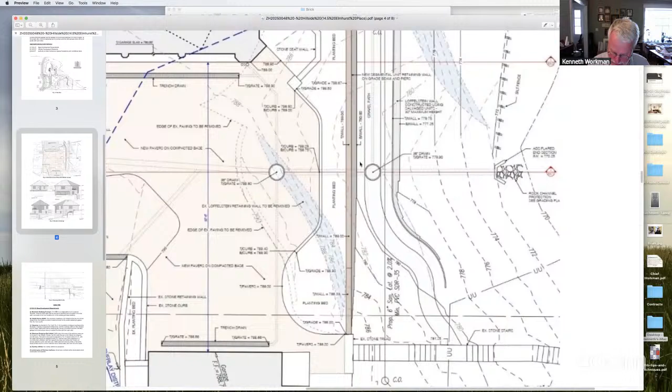This might be a little fuzzy, but this is the existing 2-car garage on the main dwelling. This dashed line represents the footprint of the existing garage that is going to be demolished, and this is the footprint of the new home. We've got a retaining wall along here that helps expand and make access into these garages with a vehicle a little more convenient. Right now, if you can see this little S-shaped curve, it really restricts access into this bay of the existing garage.

We've got a paved area here, basically a 6-inch high curb bounding the paving, a landscaping bed, and this is the wall that is item 1 in the request for relief. This wall is on piers, as is the majority of the new structure, socketed into bedrock.

Importantly, this dashed line represents the hillside overlay district boundary. We are just at the very, very edge of the overlay boundary. It just clips a little bit of the new proposed building.

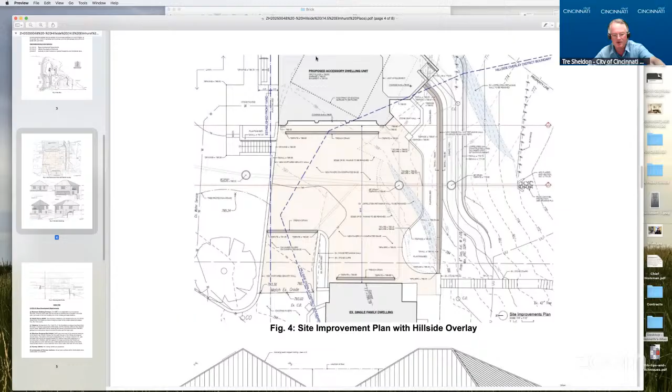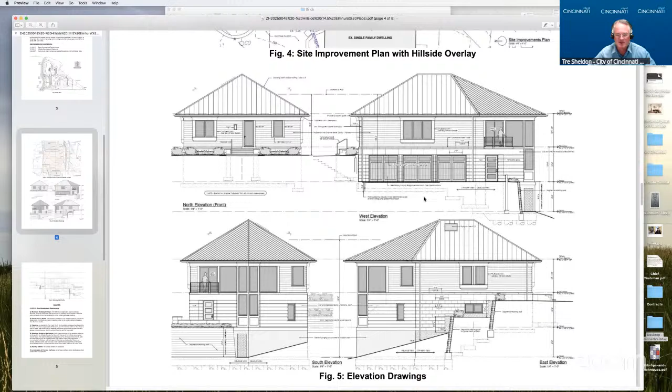Ken, this is Tre. I'm not going to start with my regular comments right now, but I think it would be helpful for the zoning hearing examiner if you go down a bit further to the elevation drawings, so she can understand how it presents as a single story. You can explain it, but it's important that she understand that from the north, this still presents as a single family, single story structure, no greater than the existing garage. I'll let you go.

So helpful, good point. This would be the lawn area, basically the line of the lawn area, and this is what the elevation would look like from the street. There's an existing stone retaining wall that bounds the north side of the existing driveway.

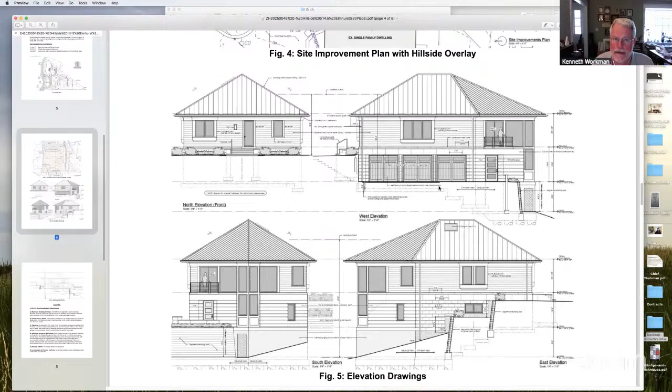That would be this area. I'm not sure if you can see my cursor, but I can. This is the 3 new garage doors that would be here. This is a relatively level area, essentially at the same elevation as it currently is.

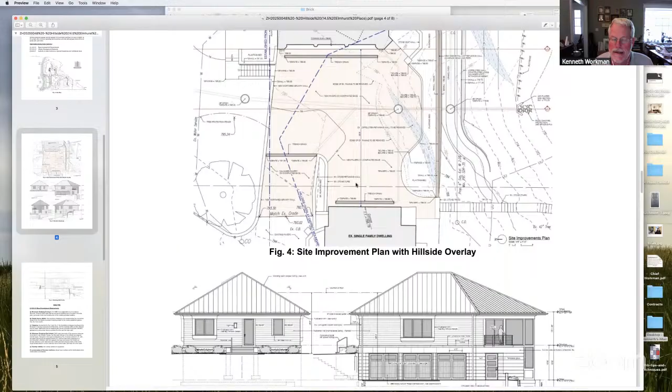And if we come down here again, this would be the retaining wall we talked about, on piers. Then this is a little pathway below that retaining wall allowing access to a sub-basement, a gravel or mulch pathway. So you can see how we are stepping down the hillside.

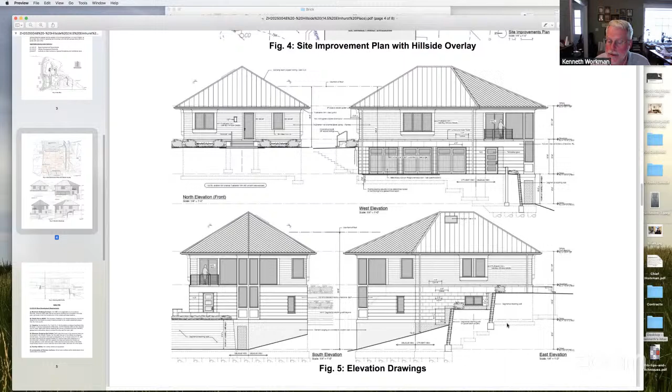This is the east elevation. We've broken that retaining wall up into 2 shallower segments, and this whole area you see here is actually outside the boundary of the overlay district. It really only impacts the building in this area right here.

Okay, so does that help explain? Yeah, I get it. Thank you.

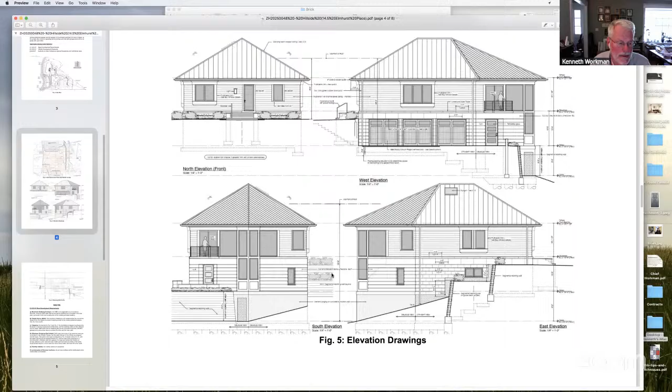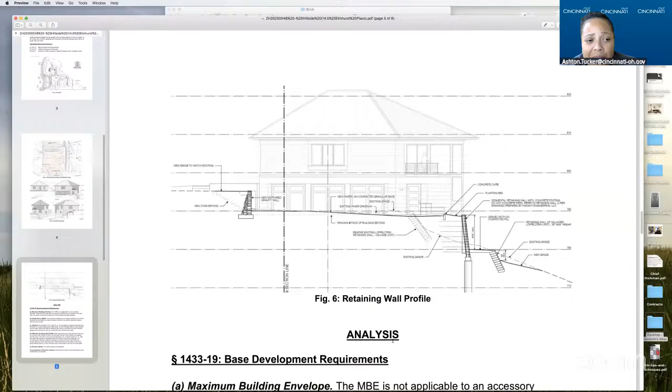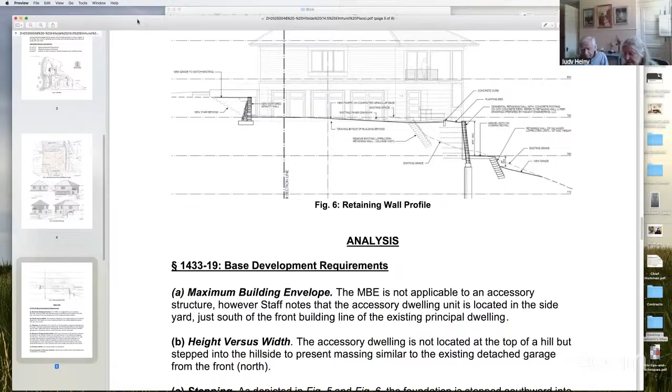Please. Yeah, I could just add that at the front of the garage, the heavy load of water and soil is impinging on the existing garage, causing it to slip and separate. By the way, that garage was built in 1918, so it's seen a few years.

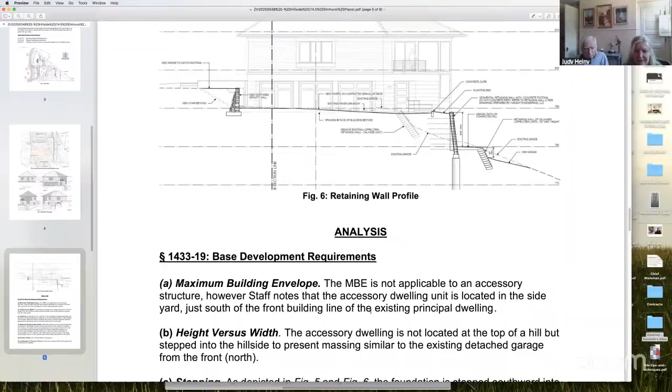That flat area, which a previous owner leveled to make a playground for his six kids, is also subject to water - there's a street storm sewer which just empties into the yard. So as part of this project, we're going to reconnect that to, I believe, an old 1900 brick square sewer, connecting it to an existing sewer lower down the hill so we'll take some of the water load off that front load. We've had a hydrologist look at that.

So. Okay. Thank you. Anything from you, Jeff? No, I'm here for answering any questions, but I don't have much to add at this time.